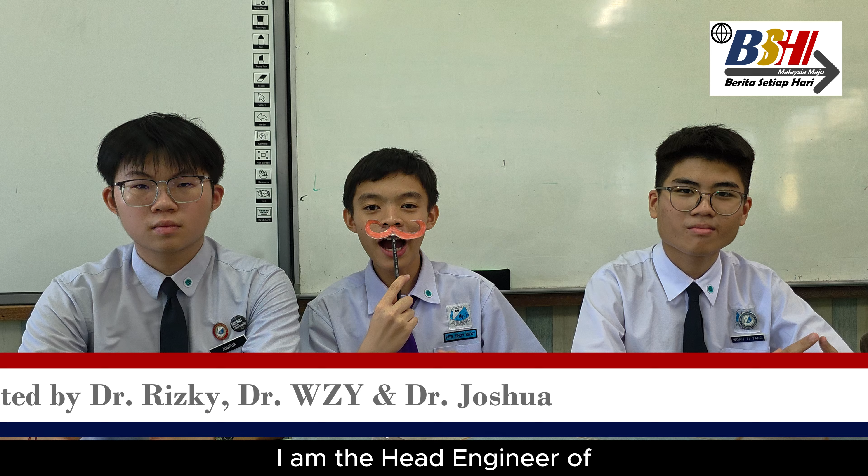Good morning everyone watching Malaus Research. I am the head engineer of MALAUS research. These are my co-workers. Today we're going to talk about how planes fly.

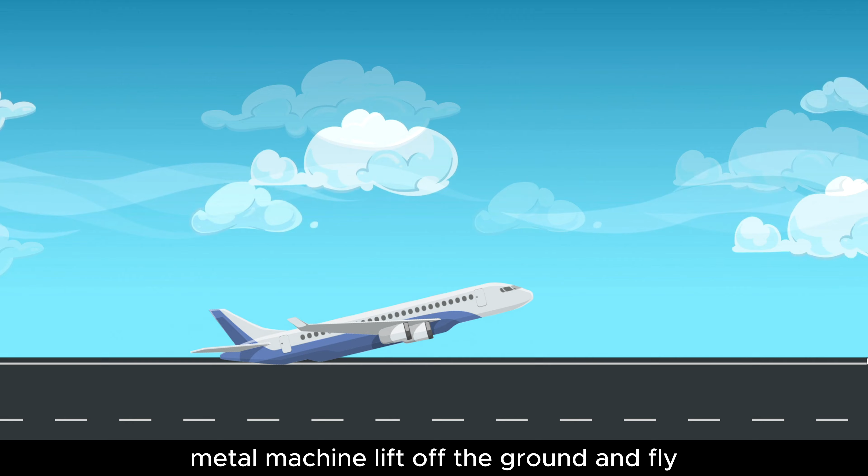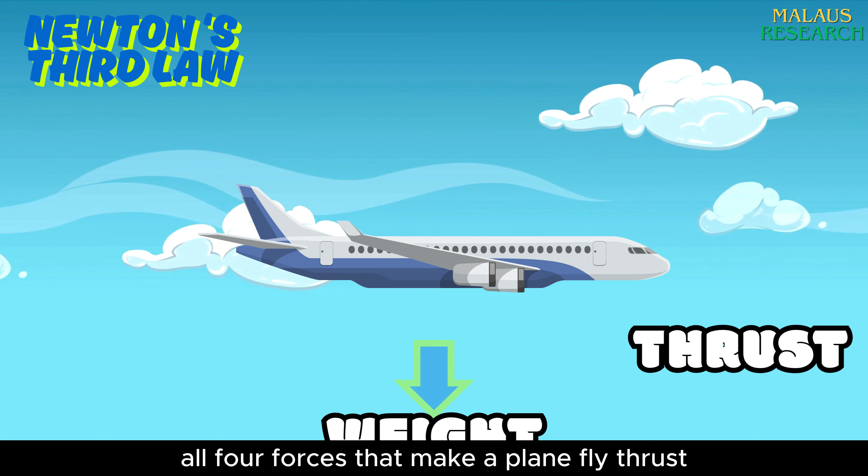So what actually makes a giant metal machine lift off the ground and fly? It all begins with Newton's third law. This law says for every action there is an equal and opposite reaction, meaning if you push on something, it pushes back on you with the same force but in the opposite direction. This law is behind all four forces that make a plane fly: thrust, lift, weight, and drag.

Thrust: when a plane's engine pushes air backwards, the plane is pushed forwards. This forward motion is called thrust, and is the first key to flight.

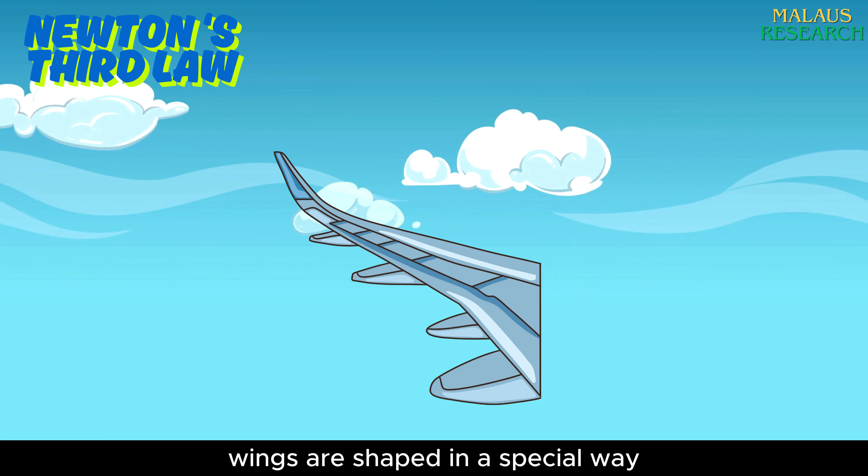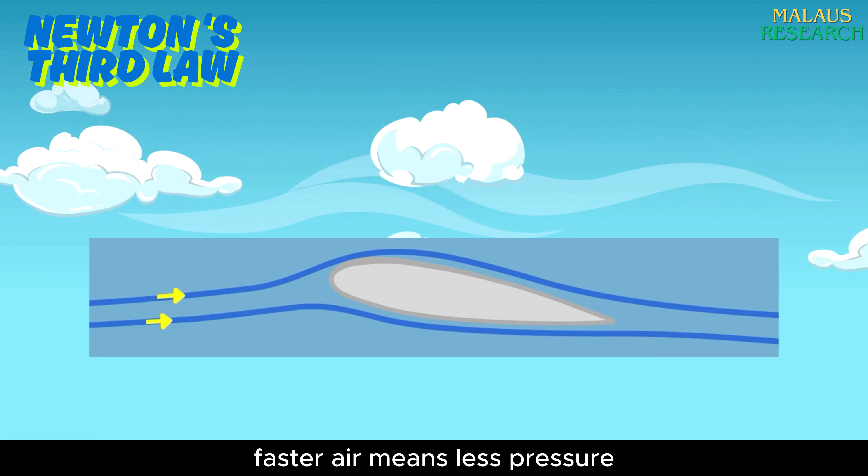How does a plane fly? The answer is lift, and it comes from the wings. Wings are shaped in a special way called an airfoil. The top is curved and the bottom is more flat. So when air flows over the wing, it goes faster on top and slower underneath. Faster air means less pressure, slower air means more pressure. So the air under the wings pushes up harder than the air above it, and that creates lift.

Imagine you're in a moving car and you stick your hand out of the window. If you tilt your hand, it feels a little lift, right? That's exactly what a wing is doing, just way better.

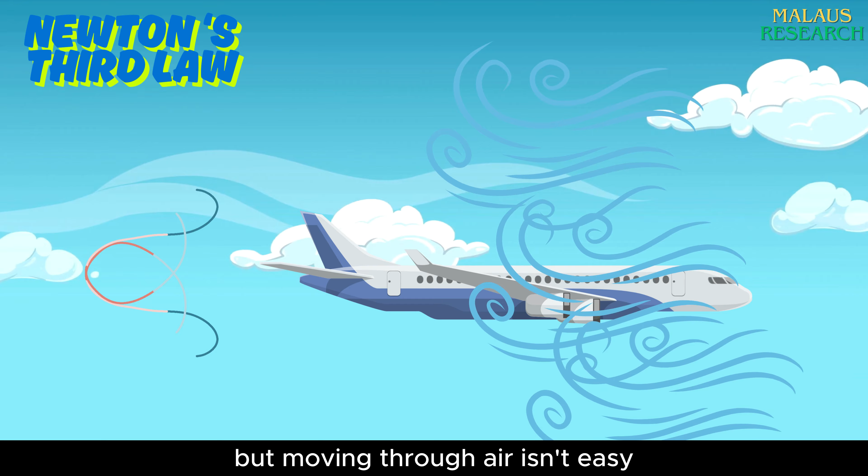But moving through air isn't easy. The air pushes back; we call this drag. Drag is air resistance. It fights against the plane's motion, trying to slow it down. The faster you go, the more the air tries to stop you. That's why planes are built to be aerodynamic.

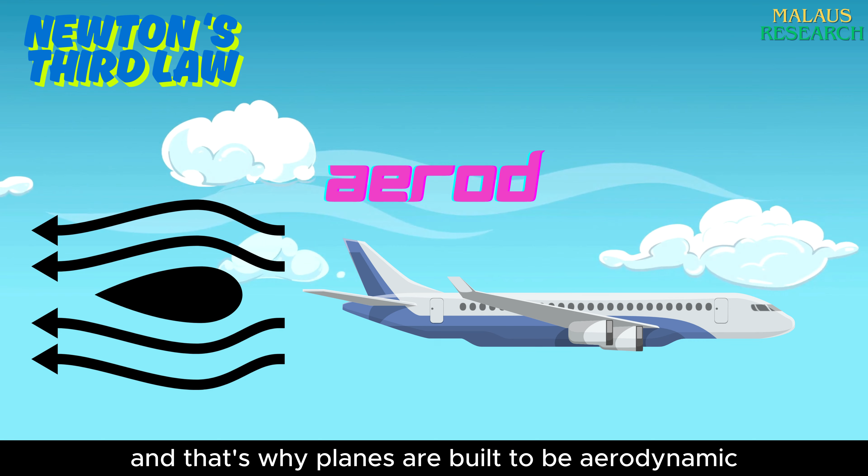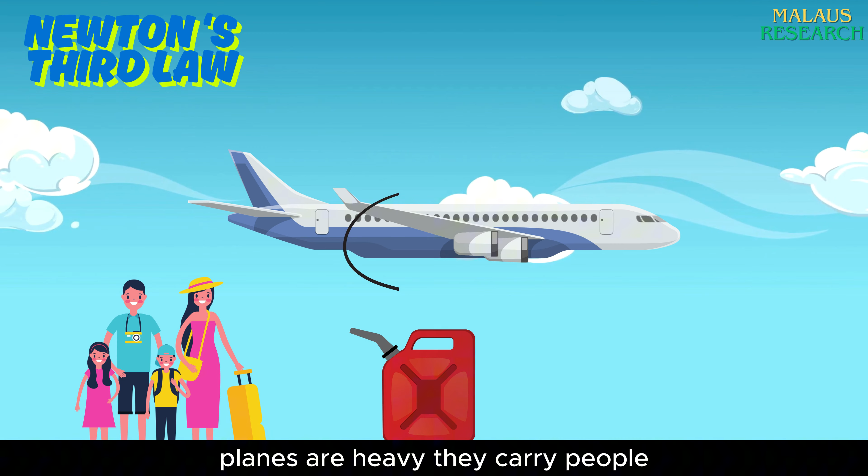And finally, there's weight, the force of gravity pulling the plane down. Planes are heavy; they carry people, fuel, engines, wings, and cargo. So for a plane to fly, lift must be stronger than weight.

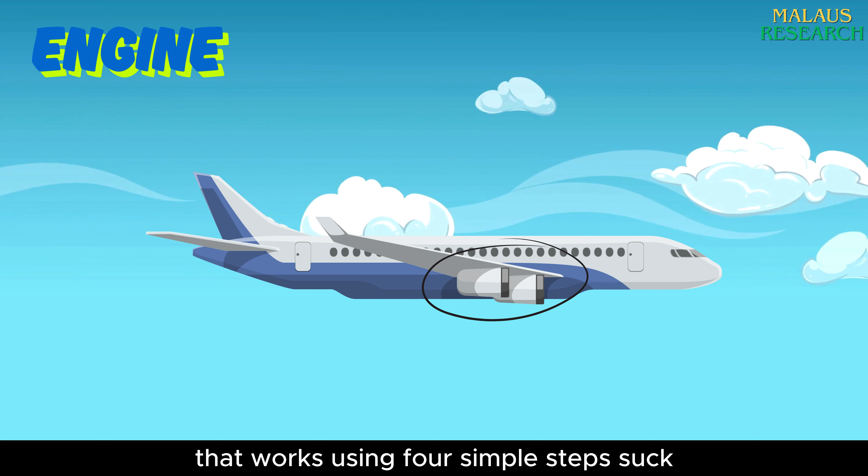Now let's get through how a jet engine works. A jet engine is like a giant metal tube that works using 4 simple steps: suck, squeeze, burn, and blow. First is suck: a big fan at the front pulls in air, kind of like a vacuum cleaner sucking air in. Second is squeeze.

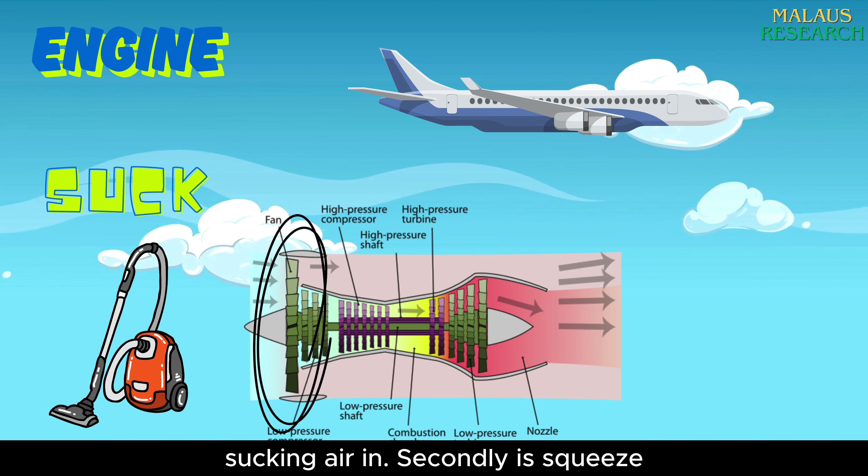That air is then squeezed tighter and tighter using spinning blades, like pressing air into a smaller and smaller space, building up pressure. Next, the engine sprays fuel into the compressed air and lights it. Boom! It explodes like a small fireball. Not enough to destroy, but enough to create a lot of power.

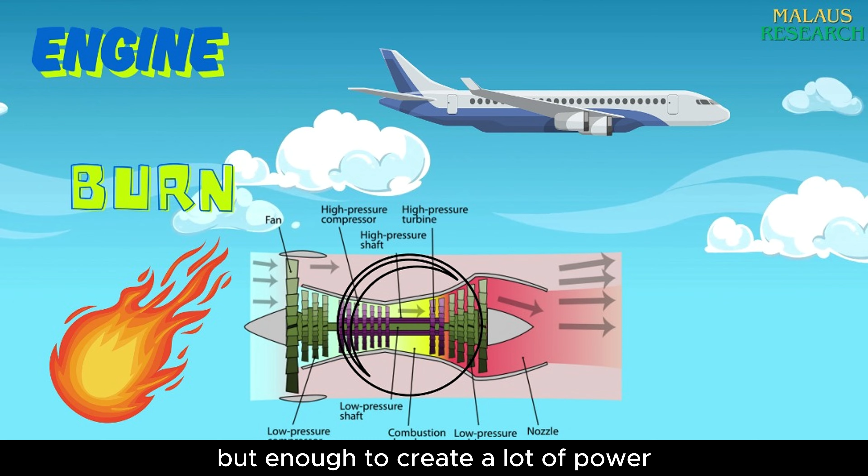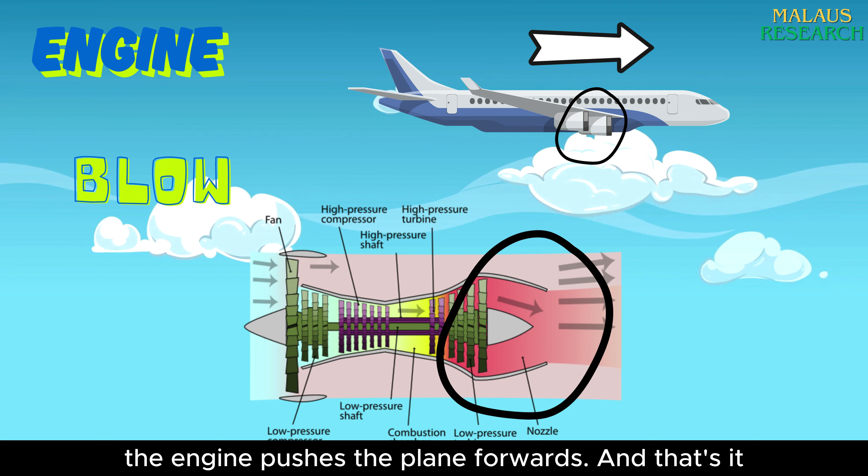Lastly is blow. The hot air rushes out the back at super high speed, and just like a balloon flies forward when air shoots out the back, the engine pushes the plane forwards. And that's it: air in, squeeze it, burn it, blow it out, and the plane flies forward.

That's simple, right? We already know the main theory, Newton's third law. But have you ever wondered how does a plane actually take off, climb into the sky, and turn left or right? Let's break it down.

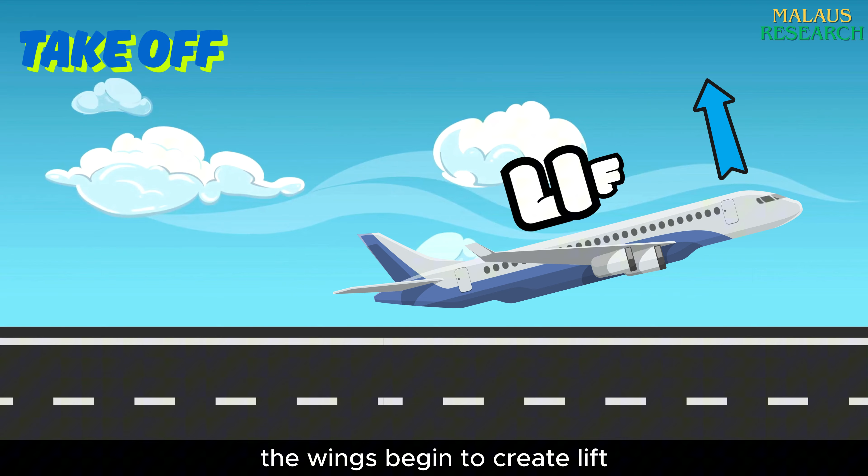When the plane starts moving fast on the runway, the wings begin to create lift. The faster the plane moves, the more lift builds up under the wings. At some point, the lift becomes strong enough to beat gravity, and just like that, the plane leaves the ground. So takeoff happens. Taking off is just the start.

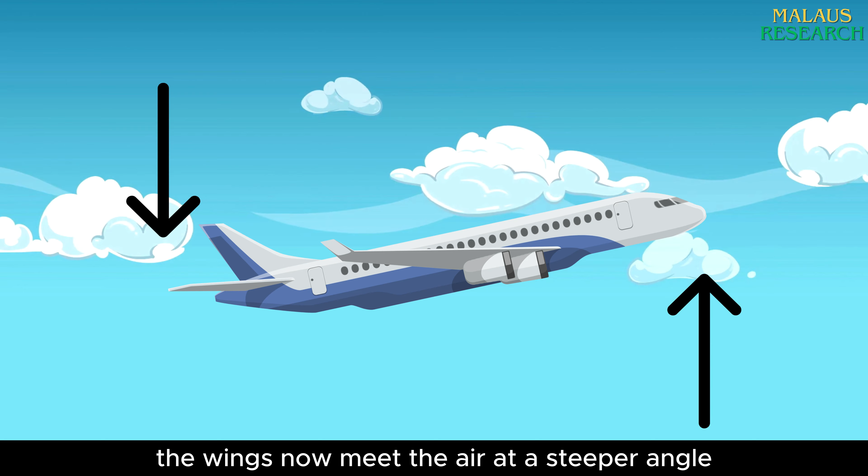How does the plane actually go high into the sky? That's where the elevator comes in, a small flap on the tail. When the pilot tilts the elevator up, the back of the plane gets pushed down and the nose goes up. The wings now meet the air at a steeper angle, and that angle creates even more lift.

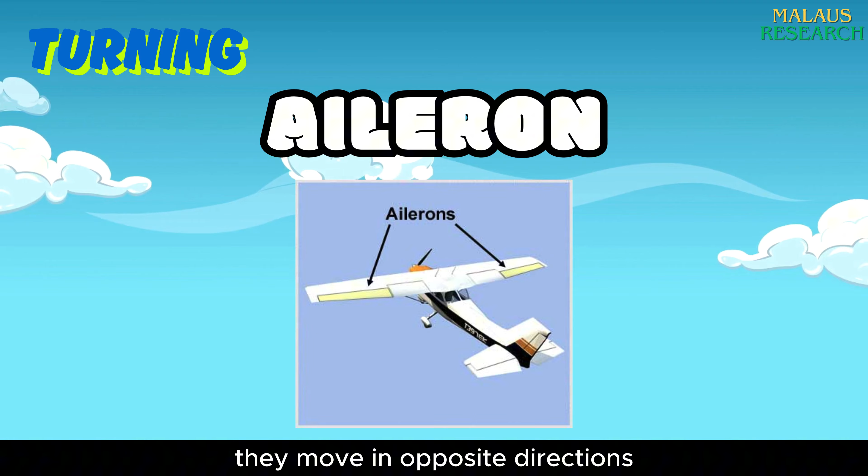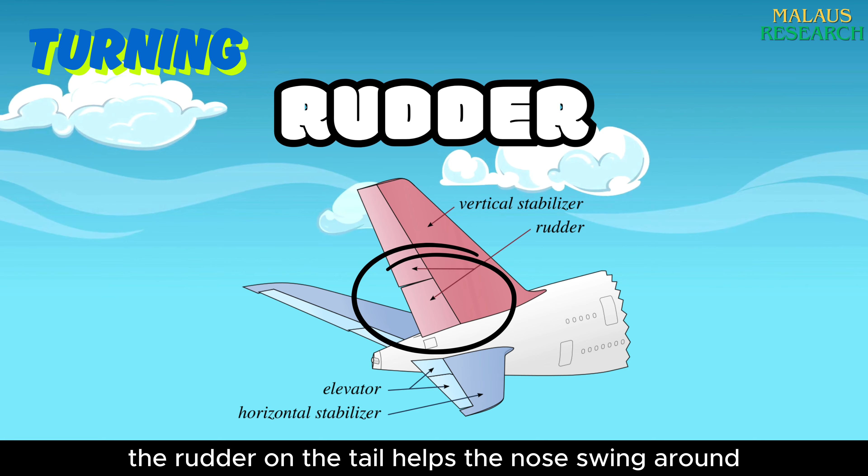So the plane starts to climb. Lastly, how does it turn? Each wing has a tiny flap called an aileron. They move in opposite directions, one up, one down, making one wing lift more, the other less. The plane leans or banks, and when it leans it doesn't just go up, it starts moving sideways. That's a turn. The rudder on the tail helps the nose swing around smoothly, like steering a boat.

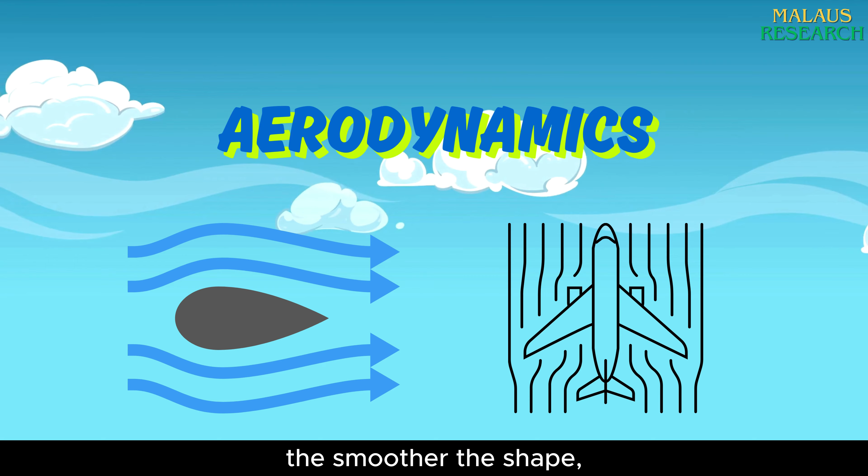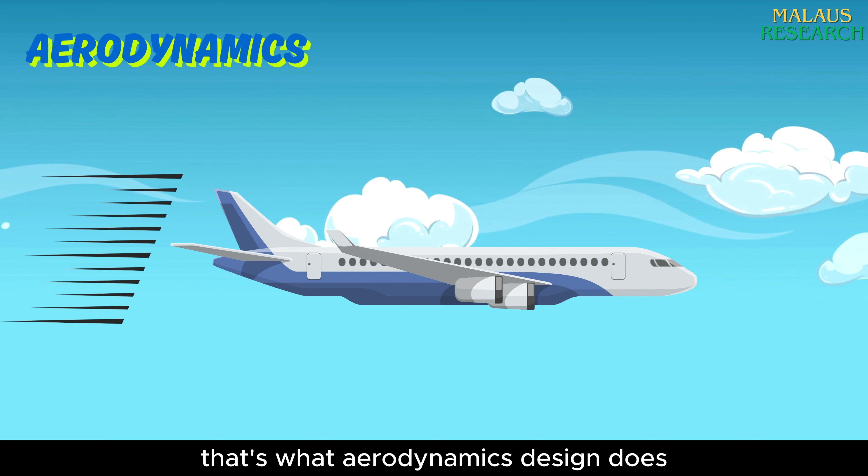Let's talk about aerodynamics. Aerodynamics is how air flows around the plane. The smoother the shape, the easier it slices through the air. A good aerodynamic shape means less drag, more speed, and better lift. That's what aerodynamic design does: it helps the plane move faster, smoother, and higher. Even birds have aerodynamic bodies. Nature figured it out before we did.

And that's the story of how planes fly. No magic, just science. Thanks for watching Malaus Research, where we keep it simple, smart, and a little silly.